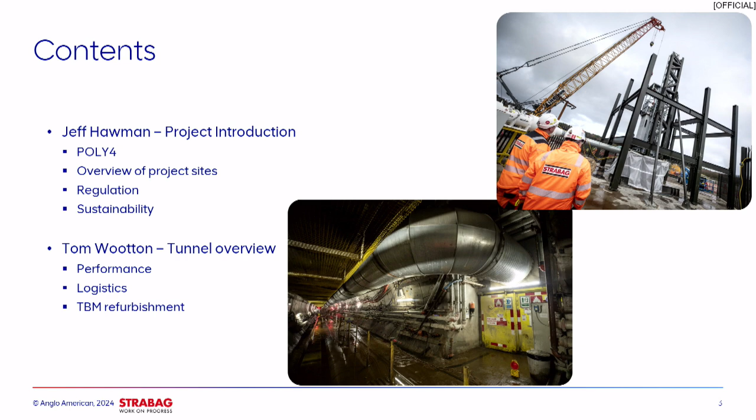I'll give a quick overview of what's in store for this presentation. I'm starting off with an overview of the project, Poly4, our crop nutrients product, a little bit about regulation, and then sustainability. Then Tom Wilton will talk about the tunnel in more detail, Callum will talk about our intermediate shafts, and then Ashley will talk about the challenges and some of the successes we've had on the project.

I'll start with the product, which is the reason we're building the Woodsmith mine. Poly4 is the trademark name for our polyhalite products from Anglo American's crop nutrients business. It's a multi-nutrient, low chloride fertiliser, certified for organic farming. It contains 4 of the 6 essential macronutrients required for plant growth: potassium, calcium, magnesium, and sulphur.

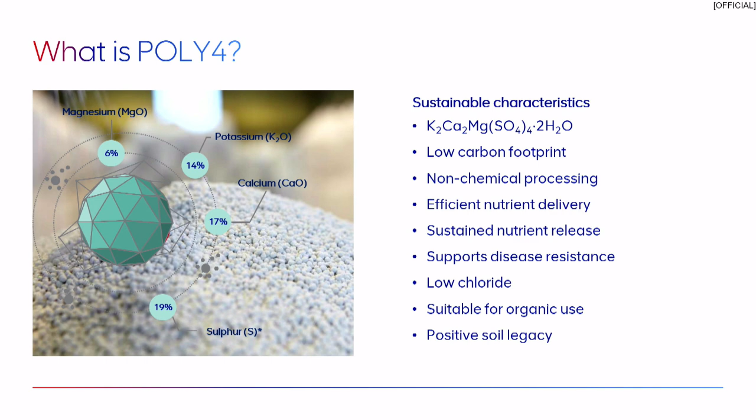This is a plan view of the Woodsmith Project. It's based in the north of England, from Teesside down to the North York Moors National Park, which isn't necessarily the place you'd typically expect to find a Tier 1 mining project. But the mine is an opportunity for Anglo American and also for the region and the UK in general. In addition to the capital investment we're making, the jobs we're creating, and the social programmes we're investing in, we're also building an extraordinary project which will help improve skills in the area and prepare us for future opportunities.

You can see from the slide in red that's the lease area for the project, and it's significant. Currently we're only focused on this small area for our ore reserve and mineral resource, shown in purple. This small area is made of 290 million tonnes of reserves and inferred resources. In the life of asset plan, giving us approximately 40 years of life, the exclusive mineral resource is approximately 2 billion tonnes, which gives us potential for decades to come, beyond the first 40 years.

Other key features of the mine are the 1-to-1 ore to product ratio, and we're targeting at full production 13 million tonnes per annum. In relation to the resource, it's not the only one in the world, but it is the largest known deposit of polyhalite in the world, and we have a unique resource with the size and scale needed to be a multi-generational mine.

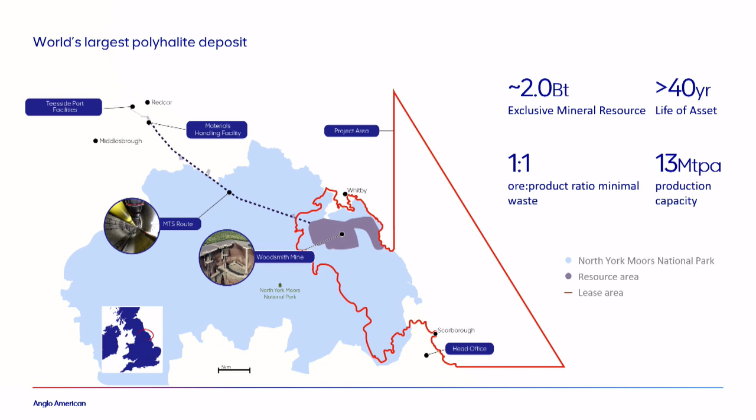A sectional view of the project. Red is current progress. Firstly, we're starting at the left-hand side, that's the Woodsmith mine site. There's two 1.6 kilometre deep shafts, the service shaft and the production shaft.

These will be sunk to the final elevation by our shaft sinking contractor Redpath. When done, these are expected to be the deepest mine shafts in Europe. From a status standpoint, the service shaft is at 804 metres and the production shaft is at 712 metres. The production shaft has benefited from lessons learned from the service shaft, which was started sooner. We're very pleased with the progress Redpath have made in the shafts since they started in 2022.

Slightly to the right of that on the drawing is the mineral transport system shaft and the MTS level underground facilities. That'll handle the polyhalite ore, which will come up the production shaft and will be transferred onto the tunnel conveyor.

Thirdly, going from there to the port is the tunnel. This is a 37-kilometre tunnel underground transport route, used to carry material from the mine to the handling facility at the port. Today we are at 29.3 kilometres in.

Along the route of the tunnel, there's two intermediate access shafts at Lockwood Beck and at Ladycross Plantation. To complete the picture on the right, we have a materials handling facility planned to be built at Teesside at Wilton, and a port facility into the River Tees. These sites are where the polyhalite will be granulated and loaded out for shipping.

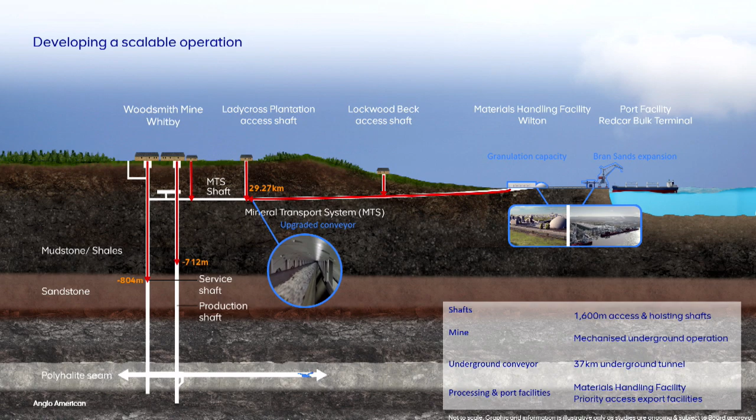Looking at these photos, you can see how different the Woodsmith project is to a traditional mine and the infrastructure approaches used in the past. This is the standard we are setting for the future of our industry and is something we're very proud of. Woodsmith is without a doubt the industry benchmark project in sustainability.

The future visual is the top left picture there of the finished mine site, what it's expected to look like. When in operation, you wouldn't really know it was there. It's just going to look like farm buildings.

In addition, we have very little impact to the area around the mine site due to the use of the tunnel to manage material from the mine to the port, limiting the number of people and materials coming to site.

To compare, you can see on the other pictures waste dumps and transport infrastructure that others have had to build in the past. You can see the visual impacts with large head frames above ground, long railways and significant dumps. They'll have their legacy, and we will be the opposite.

And this isn't just for operation either, this is also during construction. We abide by strict limits on lighting, noise, traffic, emissions and water to minimise impact to our neighbours in the National Park and elsewhere, and to the environment, and actually expect to achieve a net positive impact on local biodiversity. We're setting a new benchmark on how mining will be done in the future, today.

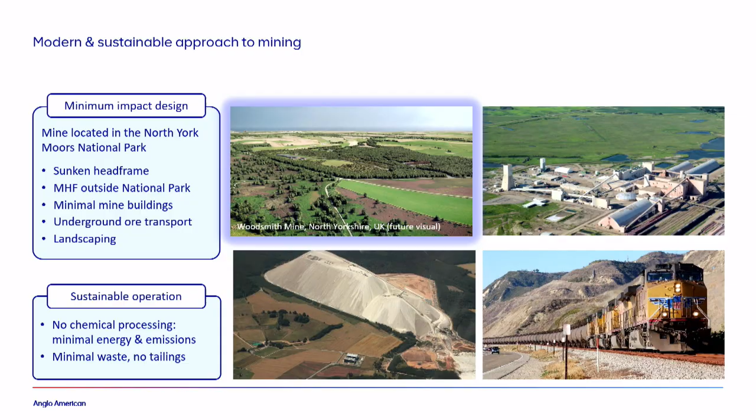This is a picture from last year of the Woodsmith mine site. You can see on the left there, that's the MTS shaft with the headgear. That'll all go when we go into operations. To the right of that is the production shaft and the service shaft with the headgear underground in the foreshafts.

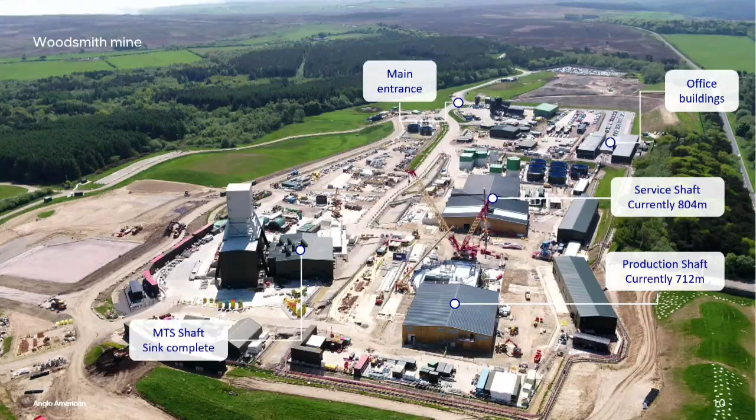This is actually a photo of the production shaft prior to the roof and the head frame being installed. It's an excellent photo to show how the shafts were constructed to minimise surface and visual impact. What you see is the foreshaft, which is a concrete encased structure around 43 metres deep. This houses the headframe, which will be used to move people and materials up and down to the mine.

This structure, again around 43 metres, would normally be on surface and be seen for miles around. But since this is being executed in a national park, and we are integrating with the needs of the community, we have sunk all of the steel below ground. This translates to a mine that has very little visual impact during construction and even less during operation.

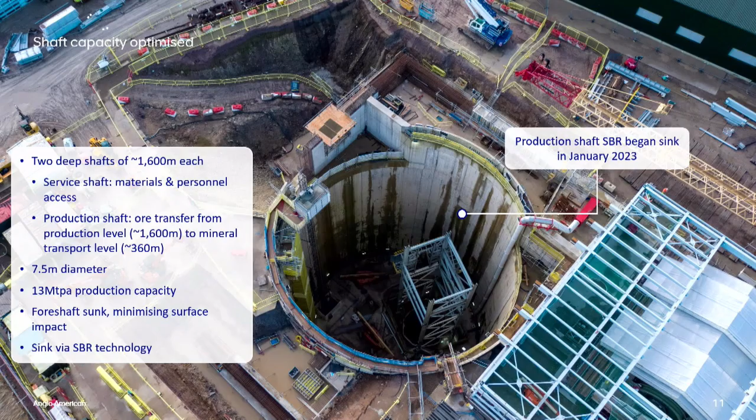We're using shaft boring road headers, SBRs, to excavate the two deep shafts. These SBRs are an updated version of those used on BHP's Jansen project and also in Belarus. These machines are inherently safer than traditional sinking. They also reduce the need for explosives, which is a huge benefit, and they're just safer, quicker and more predictable.

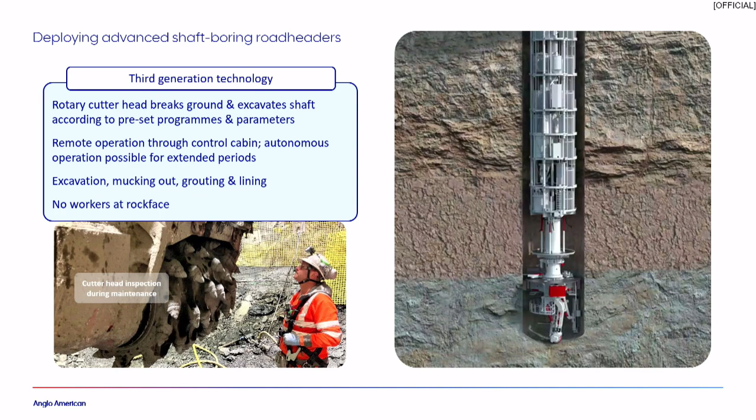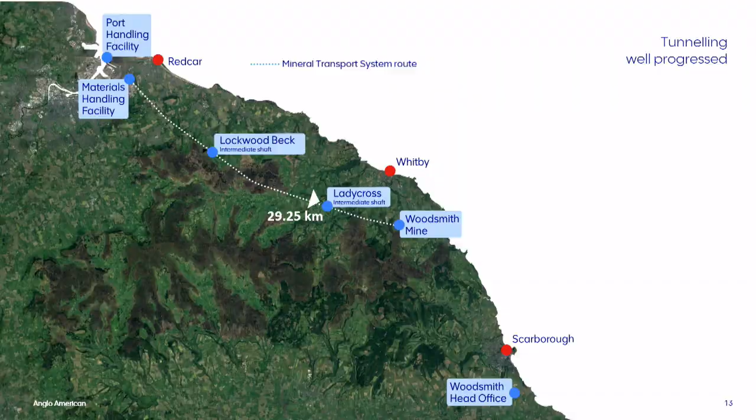So the tunnel is the backbone of the project and the future of the operation. It will be the conduit to provide the mine all the essential services for the operation, including power. It is our main transport corridor for the product via the product conveyor, and the tunnel eliminates many of the environmental and social impacts that mines typically have, especially with the communities. Ultimately, this is the most efficient and reliable transport system for our mine, and is another key reason why we will be a low cost, low carbon mine.

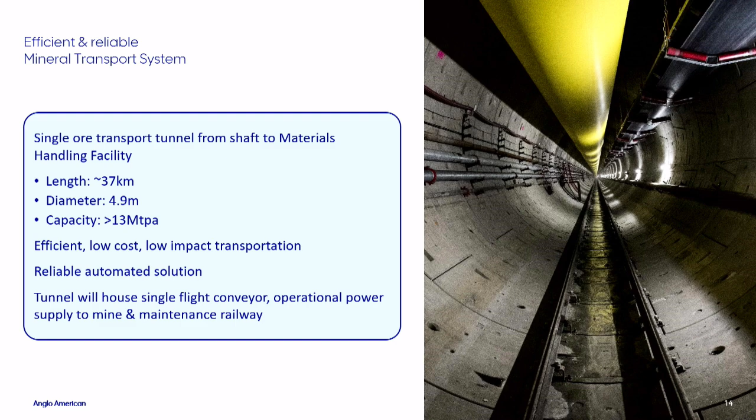Since the start of the project, the progress from the TBM has been excellent. There are many positives to talk about the tunnel construction, the main one being our contractors STRABAG. They're one of the world leaders in tunnelling technology and have successfully executed numerous large and technically complex tunnelling projects in many jurisdictions, and they are a world-class tunnelling contractor. One of the key features of the tunnel is that the ground conditions over the full length of the tunnel are very consistent within the Redcar mudstone. Conditions are very predictable, and cutting has been easy for the machine.

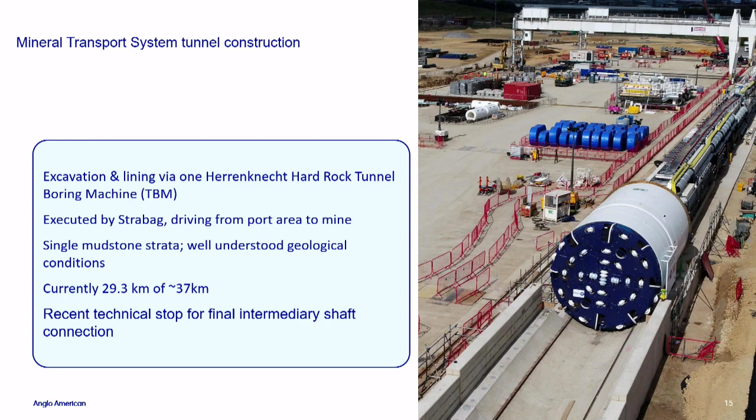Compared to many process plants in mining, this is very straightforward, as you can see from the simplified flow sheet. We crush and grind the product, mix it with a binder, granulate to produce 2 to 4 millimetre granules, and then it's dried and coated with a wax coating to protect it during transport and spreading. There's been considerable time spent over the last few years optimising the flow sheet via our on-site research and development facility, also at Wilton. And we are now satisfied we have the right flow sheet with known technology that can deliver the granules needed by the farmer in the field.

Nowhere in this process is there any kind of chemical processing like with muriate of potash. It uses very little water. Everything produced at this plant will be sold around the world and in the UK.

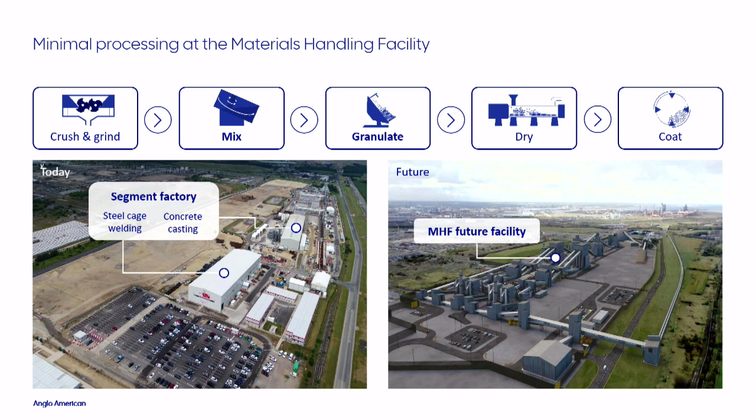The final piece of infrastructure for the project is our deep water port at Bran Sands on the River Tees, just a few kilometres from the tunnel portal. So we have our own fully dedicated, fully permitted deep water port. And once this facility is constructed, it will be able to handle all 13 million tonnes per year. Also nearby is the existing Redcar bulk terminal port, and both are near the exit of the River Tees to the North Sea. So dedicated port facilities, again, the theme of key structural benefits for the mine.

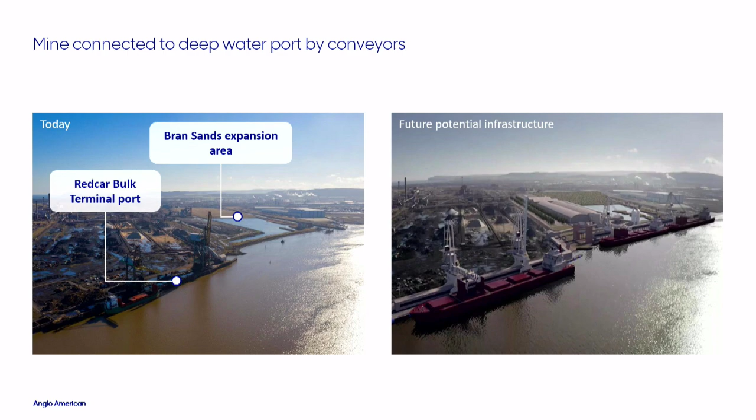Just to talk a little bit about the regulation of the project. Quite unusually for this sort of tunnel, the Woodsmith Project is regulated by His Majesty's Inspectorate of Mines, and the principal legislation is the Mines Regulations 2014. This is more understandable for the actual Woodsmith mine site, but for the tunnel scope it is unusual. It would normally be CDM, Construction Design and Management Regulations. The reason for this lies in the legislation and the purpose of the excavation, which is extraction of minerals. So this falls under Regulation 3 as being classed as a mine.

This different approach introduced change to the tunnelling construction and the risk management methodology. We believe it's the first time that a tunnel of this type has been constructed in the UK under the mines regulations.

Some of the differences we've found in the last 6 years is the different relationship between client and contractor. Anglo American, as the client, is also the mine operator, and they have specific duties under the regulations, particularly around safety. So we've had a very close relationship with STRABAG over the years, over things like safety, training, and competence. There's a lot more presence from the mine operator, from the client, on site than what would be normal. Appointed persons, for example myself, I'm appointed under the regs. I have superintendents and engineers also appointed. And likewise, the mine manager at the mine site also has an appointed team.

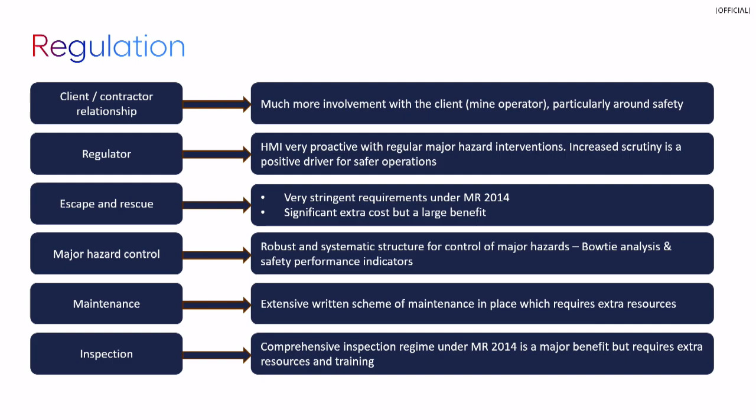We manage noise, light, traffic, and biodiversity with very strict limits and dozens of permits in place. The fact that we don't have significant processing or transportation on surface of ore means carbon, water and waste are minimised. For the community, we've generated $1.5 billion into the local economy since construction began.

Anglo American has committed to contribute $1 million a year to the Woodsmith Foundation, which has supported 550 projects so far. It's an independent charity with 5 objectives focused on education, health, hardship, environment and community facilities. All of these align to Anglo American's values and goals.

And finally, as the mine ramps up and succeeds in meeting its goals, the community benefits as we contribute 0.5% of our revenue during operation, roughly $10 million per annum. Our success and the community's success are intertwined during construction and operation, and this is really how the business should operate.

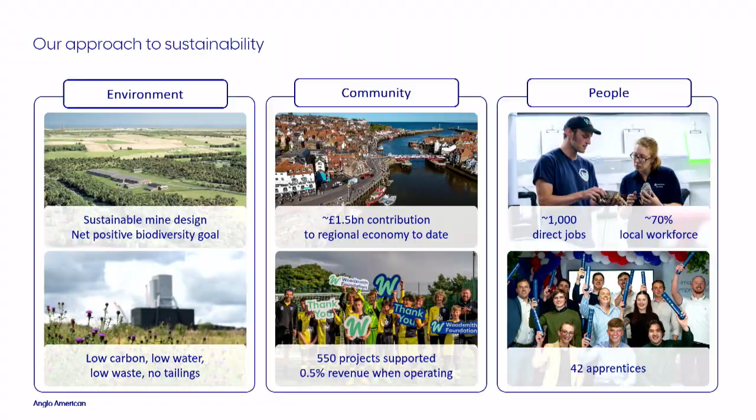Okay, thanks. I'll move on to Tom for the tunnel. Cheers.

Thanks, Jeff, and thank you for the kind words. I just want to run through a bit of an overview of the tunnelling side, what's involved in the STRABAG scope. Jeff's given a great overview of the project as a whole.

For us at STRABAG, our scope - Jeff's touched on the Wilton surface setup, the on-site production of segments. We have an on-site steel hall that fabricates the steel reinforcement, and then a segment factory which fabricates the segments used in the tunnel. We have a 300-metre launch ramp and 100 metres worth of SCL tunnel that was constructed to facilitate the launch of the TBM.

We then have the 37-kilometre MTS tunnel, 2 intermediate shafts - Lockwood Beck at 12.7 kilometres from Wilton, and Ladycross shaft at 28.5 kilometres from Wilton. We also have the SCL connection adits between the two, so between the MTS tunnel and the 2 shafts.

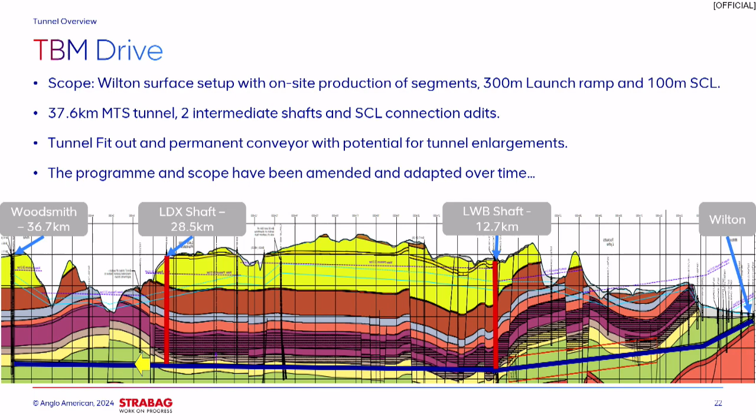Now, a 37-kilometre tunnel, the programme and scope have been amended over time. We certainly didn't set out with the intention of launching 1 TBM from Wilton and making all the way to Woodsmith.

I'll take us back to the very start of when STRABAG started on the project. The original contract and programme split the 37 kilometres into 3 TBM drives, each approximately 12.5 kilometres in length. Drive 1 was awarded to STRABAG, from Wilton to the Lockwood Beck shaft. The Lockwood Beck shaft itself was being delivered by others, sunk conventionally with a 9-metre diameter to facilitate the launch of a second TBM for Drive 2. The MTS shaft was going to facilitate a third TBM coming from the Woodsmith side and meeting up with that second drive, approximately the 26.9 kilometre mark.

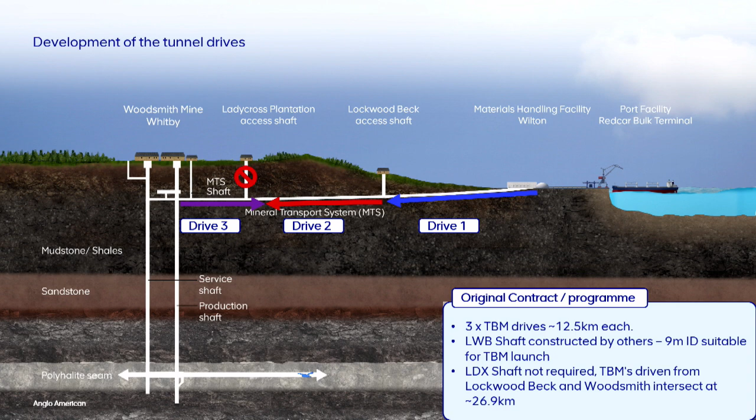At that point, the Ladycross shaft, although there was planning, wasn't deemed necessary as it wasn't a launch site or reception chamber, so it wasn't part of the planned works.

As works progressed and the TBM was launched, progress proved very successful. There were also some issues at Lockwood Beck - programming problems - and within a short period of time the TBM was bearing down on the Lockwood Beck shaft, and there wasn't the availability to launch a second TBM from Lockwood. This meant that there was an amendment to the contract.

It reduced the total TBMs required for the drive from 3 to 2. The intention being that the TBM launched from Wilton would continue on, past Lockwood Beck, to the 26.9 kilometre mark, and then the second TBM would be launched from Woodsmith.

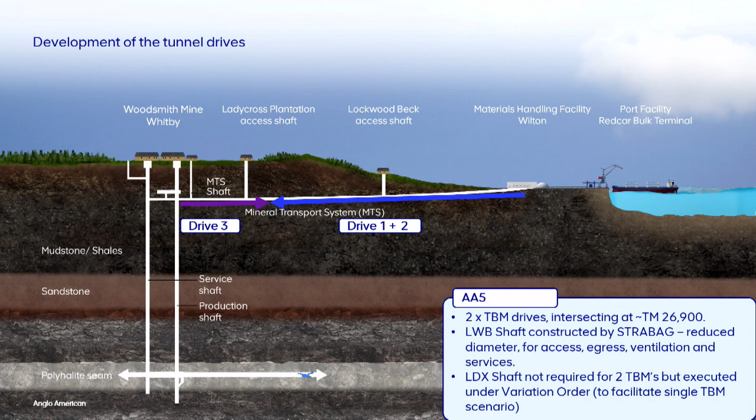At this point as well, they were intending to meet at the 26.9 mark, so the Ladycross shaft, although it wasn't vital, was then included in STRABAG's scope, just in case we came to a 1 TBM solution in the future, if the production rates were sustained for the second half as they had been up to Lockwood Beck.

Fast forward a little further, and we did maintain a lot of those production outputs. The TBM has done a fantastic job, and the teams operating it, and all the backup teams that go with it. There were some programming clashes as works progressed on the Woodsmith side with the MTS shaft. So we went away, STRABAG, and were asked to look at the feasibility of the 1 TBM solution with everything we'd put in place, to get to approximately 18, 19 kilometres by that point.

And we came back and essentially said, yes, we think it will be possible. At that point, we were glad that the Ladycross shaft had been added to our scope, and Callum will touch on that. But that's initially how we've got to the point where 1 TBM is doing the full 37-kilometre tunnel.

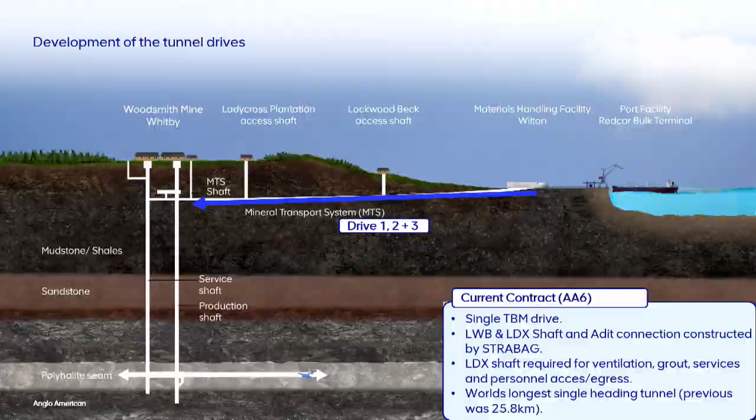As a nice aside to that, it does mean that we currently believe we've got the world's longest single-heading tunnel, the previous being 25.8 kilometres, and we've surpassed that.

Going on to the construction milestones, I'll give a few key dates. Going back to 2018, it's been a long project. April 2018, we started off with selection of the single shield hard rock TBM. Within 10 months it was on site, and 12 months it was fully assembled. April 2019 it was ready to move. In June 2019, the TBM then started its first advances.

By October the following year, 2020, 14 months later, we were at the 10-kilometre mark, and roughly 14 months after that, we were at the 18.6 kilometre mark. At that point, 18.6 kilometres is beyond the Lockwood Beck shaft. We were feeding everything from Wilton. We came to a stop at that point with the TBM.

We came back - the Lockwood Beck shaft had been sunk, and we were then in a position to connect up to that from the MTS tunnel using a shotcrete-lined connection. Also, as part of that stoppage, we did a refurbishment of the cutterhead and built a crossing outside of Lockwood Beck.

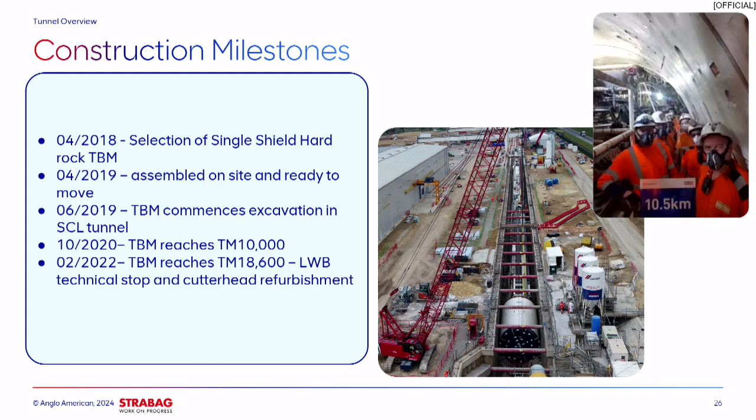Approximately 6 months later, in August 2022, we were in a position to restart the TBM. A couple of images show the Lockwood Beck conveyor booster that had been installed on the crossing just outside the adit. So the adit was complete, the cutterhead refurbishment was done, and we were in a position to restart.

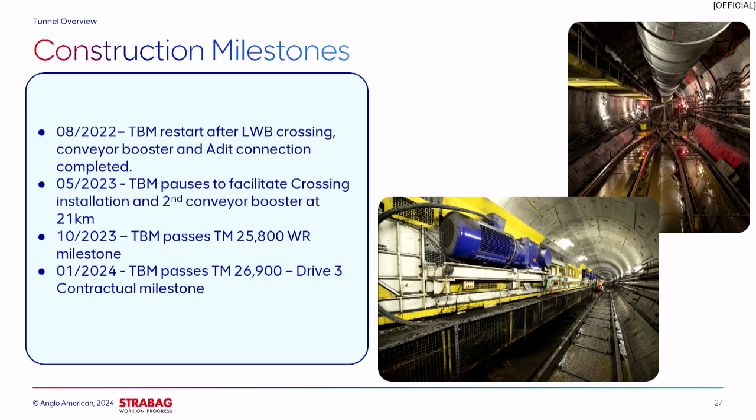The following year, May 2023, the TBM was at approximately 21 kilometres, and we paused to install another crossing location. Up to this point, we'd been running with 2 crossings - it was about time we added a third. The majority of the tunnel is single track, which I'll come on to in a second. In October 2023, we passed the 25.8 kilometre mark, and then in January 2024, we passed the 26.9 kilometre mark, which was originally the end of Drive 2 and into Drive 3.

Middle of last year then, 2024, the TBM just got past the Ladycross shaft location, 29.2 kilometres. At that point, the shaft was ready and waiting for us, so we parked up again and did a very similar exercise as what we'd done at the Lockwood Beck connection. We had a technical stop, constructed a crossing, conveyor booster, adit connection to the shaft, and also conducted refurbishment on the TBM.

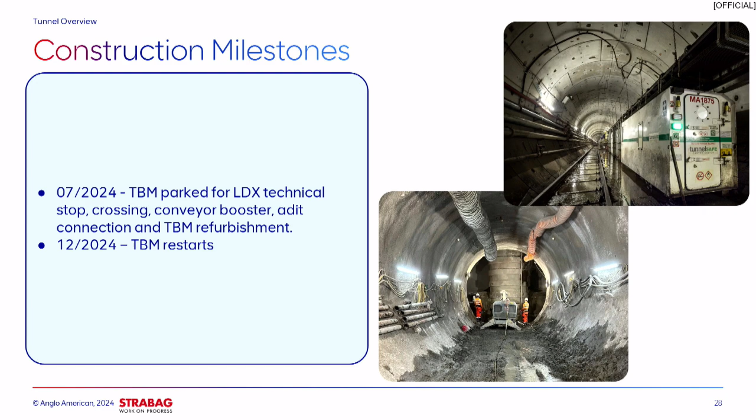December last year, so just before Christmas again, we were in a position to restart the TBM. That's a quick overview of key dates. If you put all that hard work and many millions of man hours onto a graph, that's what it looks like. There's a lot of work gone into it. But we're very proud of the performance that we've had.

Some of the numbers there: hard average, excluding the major technical stops, is over 20 metres a day. If you do include them, it's 16 metres a day. Best day to date is 52.7 metres, and the best month over a kilometre. A lot of the pauses that you can see there in production are what we just discussed with the technical stops and planned downtime. So the current position, 29.3 kilometres, and we are approximately 190 days ahead of programme, and that's something, again, we're very proud of.

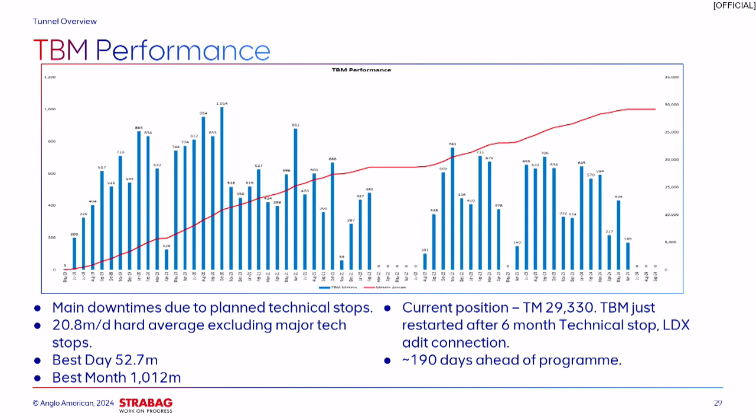So a little bit about the machine, the tunnel boring machine that's achieved this. It's a 6 metre bore diameter, 252 metres long, comprising 20 gantries. The segmental lining is 5.6 metres external with a 4.9 metre internal. That gives us an annulus of approximately 200 millimetres, so we inject 6 metres cubed of primary grout into that annulus. The segments are 1.5 metres wide and 350 mm thick, roughly about 3.5 tonnes, and all fabricated at the Wilton site.

There are 6 segments to a ring, and they're universal tapered rings. We have variations in the type of rings that we use depending on the overburden or exposure class, but in terms of dimensions, they're all the same. So there's variations in the concrete grade and amount of reinforcement.

On the TBM, we have capacity to store 3 rings. So there's three rings for the lifters. We can also then have an additional ring on the feeder. So the machine has been able to output high advance rates. We can achieve an advance and build cycle in approximately 30 minutes, so an advance taking 15 to 20 minutes and a ring build 10 to 15 minutes.

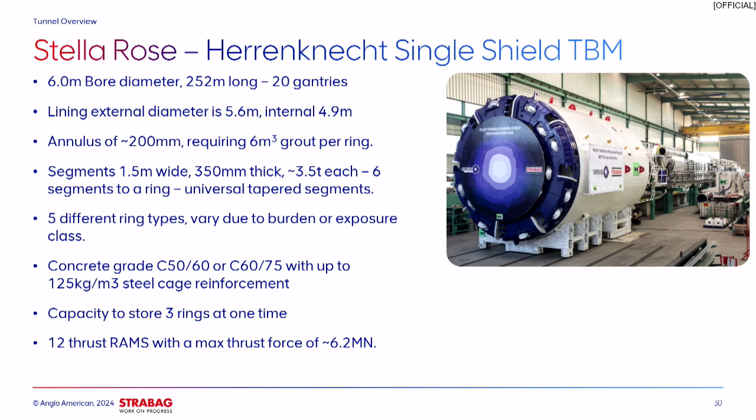Some of the infrastructure, as I've said, it's a single track for the majority of the tunnel. I'll come on to the crossings in a second, but they only make up a very small percentage. The majority, approximately 27.5 kilometres of the tunnel, is single track. It's in 9 metre sections and brought from surface down to the TBM, so that's over 3,000 sections of track that have been installed. There's no designated walkway in the tunnel. We have alighting stations, so designated hop-ups for team members to get off within the tunnel. Then it's used in the track, so we've had to separate people and plant through maintenance shifts and production shifts.

HV power, originally supplied from Wilton, is now supplied from Lockwood Beck. Ventilation, again, a key aspect, has been forced. It's initially forced from Wilton, now moved to Lockwood Beck, and once the Ladycross adit fit out is complete, we'll be moving the fans underground into the Ladycross adit, and they'll be forced into the TBM, and then exhausting all the way back to Wilton surface. Cooling water is supplied from Wilton, again pumped 29 kilometres, and then dewatering in the tunnel, again pumped back out again, a further 29 kilometres with 17 stage pumps.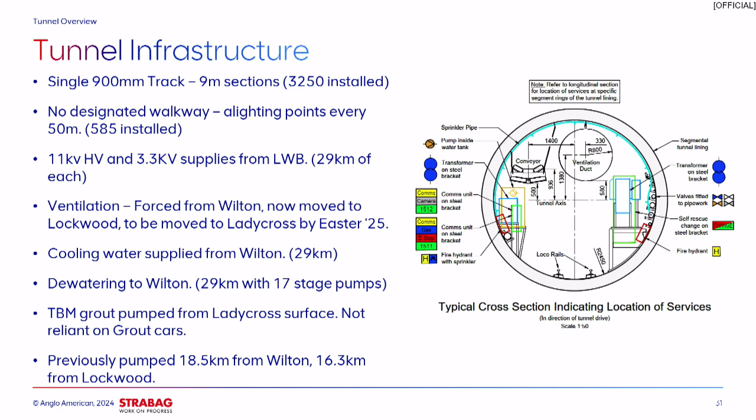Logistics within the tunnel. Currently we have 5 crossings. So working from Wilton on the left, District 1 in the pink, that's approximately 6 kilometres. So from Wilton to the first crossing, we've got 6 kilometres. That's a fixed crossing in that location, steel construction, a single loop for trains to pass. After that, District 2, another 6 kilometres until we get to Lockwood Beck, with a double loop, one side of which is where we enter the Lockwood Beck adit, so that's primarily closed off.

Districts 3 and 4 then, with the 21 kilometre fixed crossing in between. Those 2 districts are 8 kilometres each, and then we get to Ladycross, the latest that's just been installed. There we've installed 3 loops so that we can allow trains to park up and pass.

In total, we've had 22 locomotives. They're a mixture of hybrid and full electric, so diesel electric hybrids and full electrics. Running up to 5 production trains at one time, which is a tandem set, so a hybrid and an electric. Currently, the travel time from Wilton for a production train or a maintenance train to get down to the TBM is 1 hour 50.

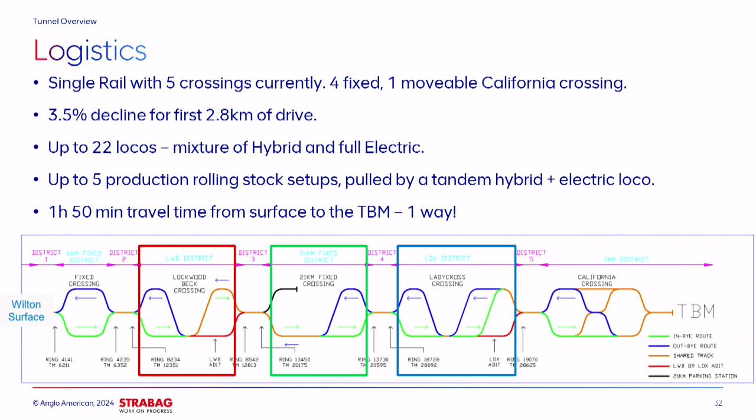A lot of planning has to go into making sure that the operation runs smoothly. It's not a quick fix, just to nip back out to the stores if you forget a pair of pliers or such.

A very brief overview of the geology. So the first 800 metres of the tunnel is through glacial till. Initially that was going to be all SCL, but after the first 100 metres or so, the ground conditions improved and the decision was taken to finish the SCL tunnel at 100 metres and launch the TBM, which proved to be a good decision.

Beyond that, primarily we've been mining through the Redcar mudstone. It's a weak, relatively low permeability rock, but there are areas with ironstone nodules and variation within the subclasses of Redcar mudstone.

The tunnel itself is relatively straight. We don't have to worry about too many curves. Maximum or the minimum curve radius is 6,000 metres, but the maximum overburden is 400 metres, so it's deeper than a lot of other tunnels currently in the UK.

Along the alignment, there's 15 major fault zones. We're currently approaching the 14th of the 15. We've also passed under various mine workings, potential for water if they were connected, approximately within 100 metres of some of the old ironstone workings. And we've also experienced a little bit of methane along the project, although it's not necessarily been linked to the fault zones.

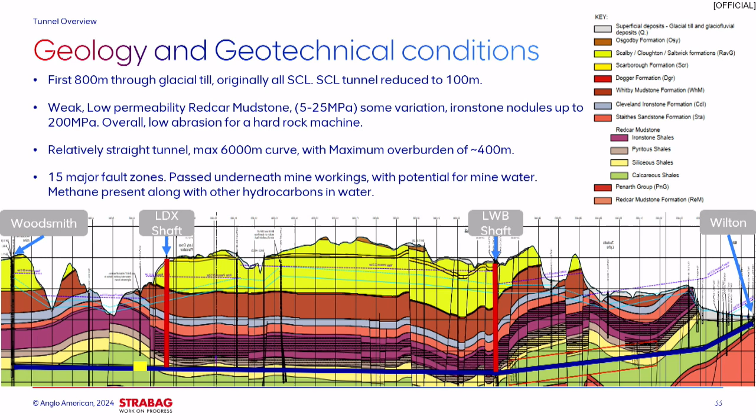So the mudstone and the fact that we've a hard rock TBM with the hard rock cutterhead, it's generally given us low abrasivity. There's been a low turnover of wear on the front. But after the distances involved, we have had to do some repairs to the tunnel boring machine.

In general, throughout the life of the TBM, we've done our utmost to ensure that maintenance is carried out on the back of the machine, but there are areas, i.e. the cutterhead, that you can't necessarily access normally. We've been fortunate to have the Herrenknecht expertise on the project. We've also made changes ourselves.

There's been several adjustments to shift patterns. Whilst it's nice to have 24/7 production, 4 or 5 times across the project we've introduced more and more maintenance periods to ensure that the infrastructure behind the TBM that I've touched on is in a good condition to be able to maintain a steady output. In terms of wear on the cutterhead, we do regular inspections. Cutter discs we can replace from within the cutterhead.

Generally, they're a low turnover. However, over time, there was indication that, especially around the gauge of the cutterhead, there was a lot of wear starting to occur, primarily on the Hardox wear plates. And the decision was taken that we would need to be able to access the front of the machine to conduct repairs.

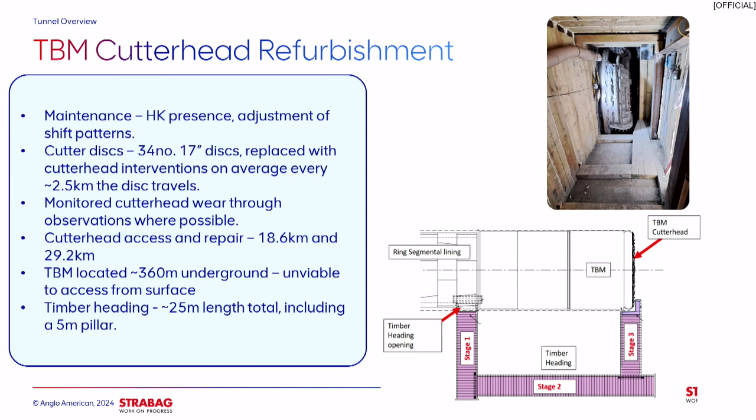This piece of work was undertaken twice, like I say, Lockwood Beck and Ladycross. On the last built ring, when we came to a stop, the key segment was removed, and that provided access to the mudstone behind.

The excavation profile was 1.6 by 2.1, with the timber frames given an internal profile of 1.4 by 1.8. Relatively tight confines as timber headings are, albeit not normally at this depth.

We managed to mechanise as much as we could. A lot of the excavation using a Brokk 70, very capable especially for its size, and mini conveyors underground to reduce manual handling.

Once the access was formed, we have had incidences of methane, but given the excavation time, a lot of that had desorbed, and we were able to manage the hot works effectively.

Once we were complete with the repairs, we backfilled those timber headings, reinserted the key segment, and once the Lockwood Beck or Ladycross adits were complete, the TBM was able to continue.

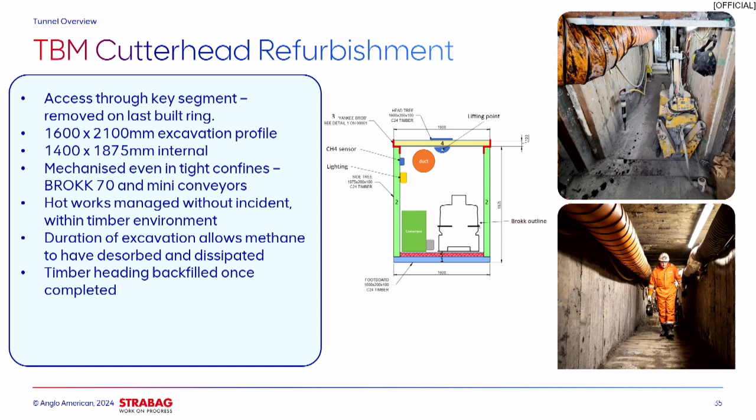So as of December, we've finished the second repair, and hopefully it's good to go for the remaining 7.5 kilometres.

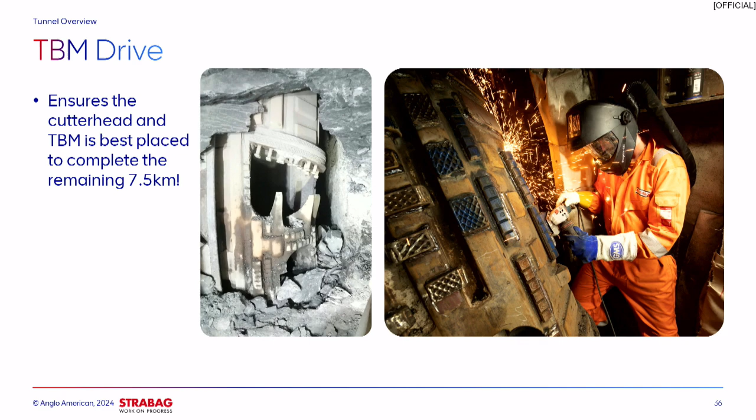Okay, I'm going to pass over to Callum, who's going to take us through the shaft construction.

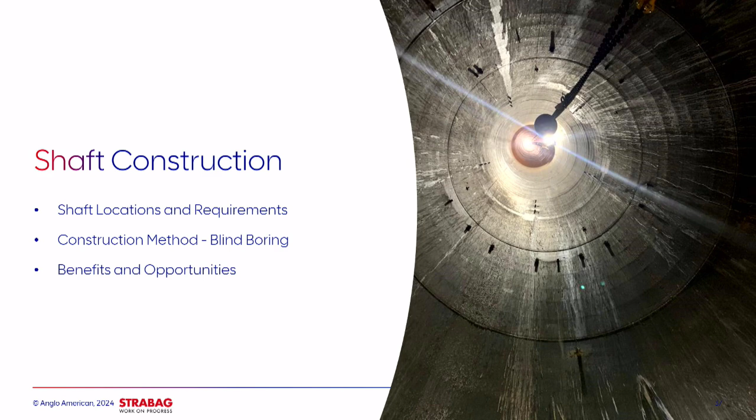Great, thank you, Tom. Good evening, everyone. So as Tom said, I'm going to take us through the shaft construction. We'll have a look at the shaft locations, the requirements of the shafts, the method that was chosen. I'll give a bit of a whistle-stop tour on how that method works, and then some of the benefits and opportunities from the blind boring.

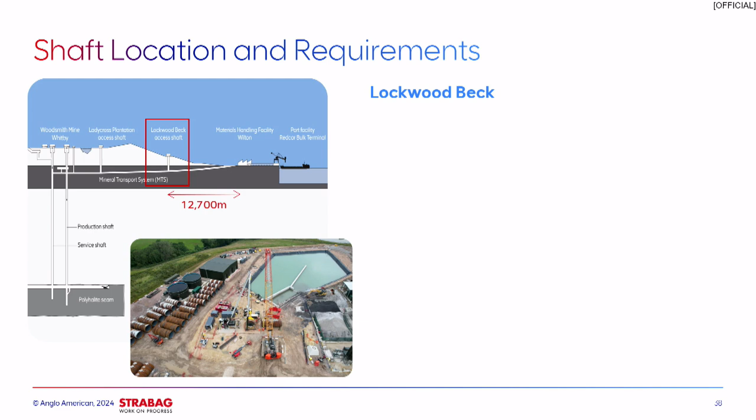So Tom mentioned previously the first shaft that was required from STRABAG was at Lockwood, Beck. The initial plan was for that to be a launch site for a TBM. However, things changed throughout the project lifespan, and it meant that there was a significant change needed. A launch shaft was no longer required. The contract had been amended to permit the continuous operation of TBM1 past Lockwood, Beck and towards Ladycross.

However, the services supplying the TBM were starting to reach their capacity, namely ventilation, which could take us through to 18 kilometres, around 5 kilometres past Lockwood, Beck. Grout was starting to see some issue. Power was a single source, so there was opportunity to back up our supply.

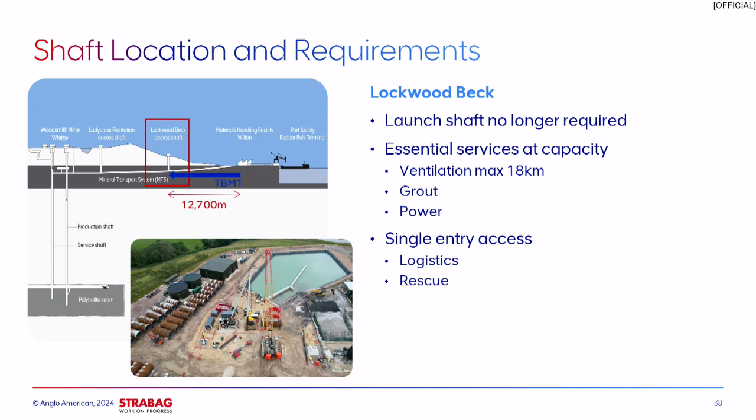But also from a safety standpoint, we were single entry, so from a rescue perspective, there were some threats to us. And also from a logistics viewpoint, it would take a long time to get us from Wilton to the current TBM position. The key challenges that we faced, it was a change to the overall scope.

And it was a change that meant that the programme fell onto the full project critical path. So that was kind of one of the key drivers for the decisions that we therefore had to make.

Geotechnically, there were faults within the Lockwood Beck site, and there was also groundwater which caused challenges. A contractor working on the site previously had sunk a shaft to around 50 metres, and there was significant challenge with inflow of water up to about 200 cube an hour, and the solution to grout that was also a challenge.

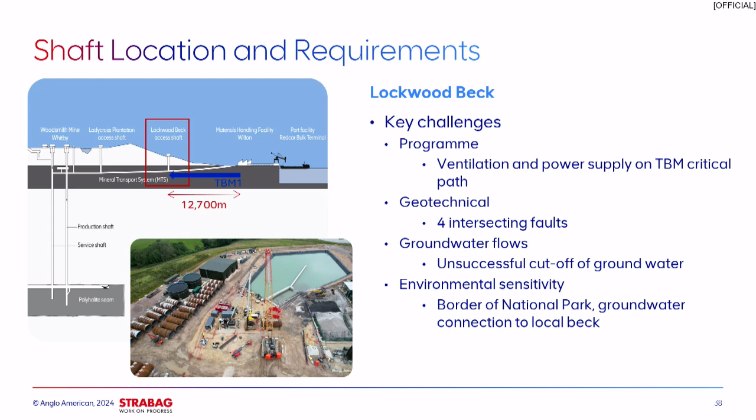Environmentally, we were on the border of the national park, so that brings its own kind of environmental sensitivities. So the shaft that was needed, depth-wise at Lockwood Beck, was 378 metres.

We had a number of different parameters that we had to fit into the shaft, and that's what came into our decision making. The ALIMAK lift car would lift 16 people up and down the shaft. Ventilation would be fed to the TBM, but also as a fresh air base at shaft bottom. Mechanical services of grout and water, as I mentioned. Electrical cabling, comms, lighting, and then a head house with the provision for rescue.

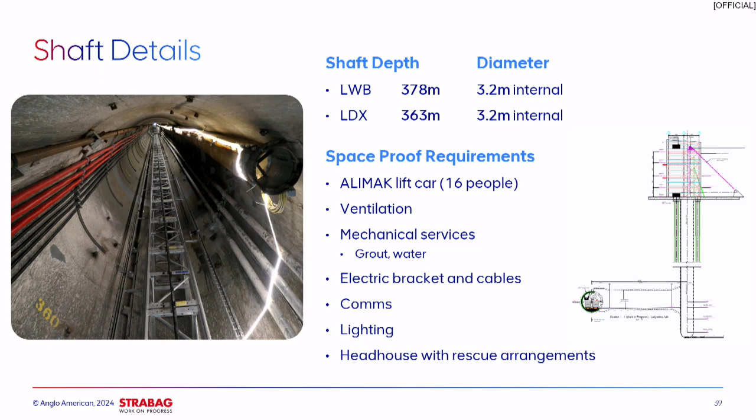Assessment was done to consider how we could reduce the diameter of the shaft and introduce new potential construction methods. We ultimately came to an internal diameter of 3.2 metres that would suffice. We assessed the various options of excavating and constructing the shaft, and one of the key parameters for us here was programme.

After various assessments, blind boring was selected as the primary option for us. For those who haven't seen it before, what is blind boring? Ultimately it's a deep shaft construction methodology, an alternative to conventional drill and blast, where works are undertaken from surface until the shaft is complete. It's much more commonplace in Australia and the United States, where the method is used for ventilation shafts to mines. It's also been seen in the UK, in South Wales in the 80s, for a similar ventilation shaft.

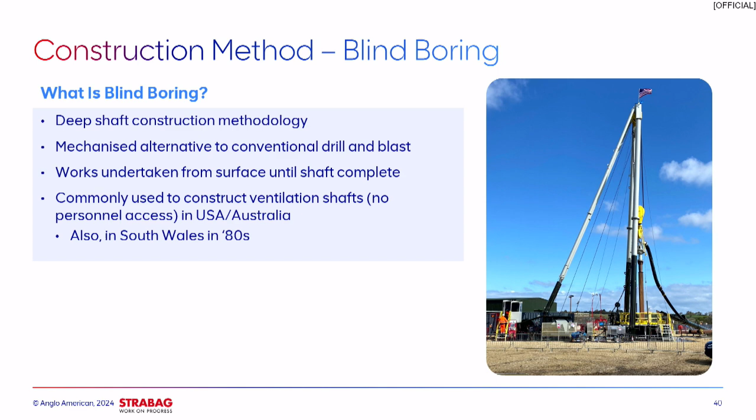We employed a contractor and worked very closely with a contractor from the States, Shaft Drillers International. SDI have rigs capable of shafts up to 5 metres in diameter and up to 550 metres in depth, so it fit our parameters. We also used, where possible, the local supply chain — a key example of that is the shaft lining.

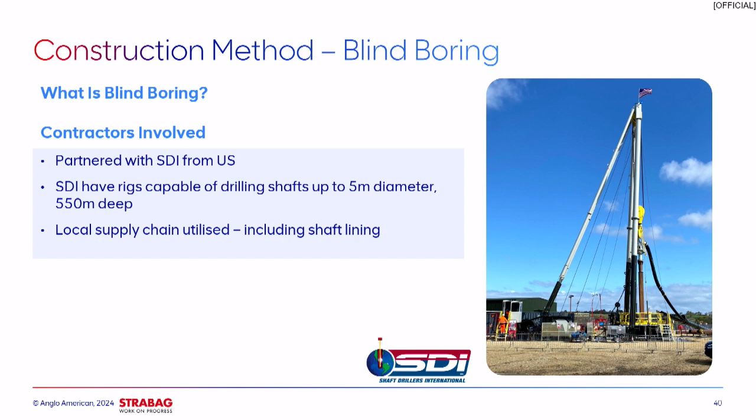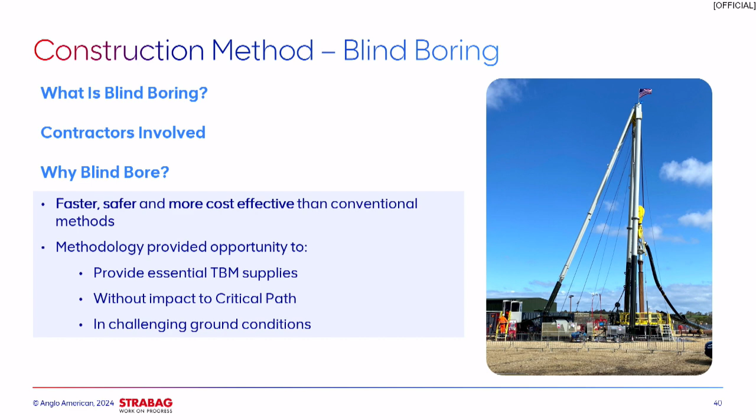Ultimately, as an assessment, why blind bore? It is faster, safer, and more cost-effective than conventional methods. For us, it provided the TBM supplies we much needed to continue the TBM drive without impacting our critical path and working through some challenging ground conditions.

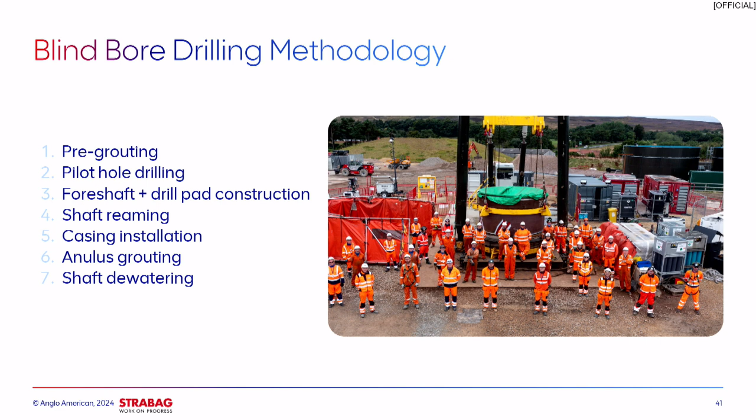So the methodology of blind bore has 7 phases that have been broken down. I'll take us through each one of those. I haven't got enough time to go into much detail, but I'll cover the key aspects of each item.

Firstly, pre-grouting. Ultimately, pre-grouting is integral to the success of the methodology. Grout holes are drilled around the circumference to varied depths, using a top-down observational approach to heal the ground. The objectives are twofold: one is to stabilise the ground to avoid any collapse, and secondly, to ensure the ground can withstand a body of water, which is essential for the following stages.

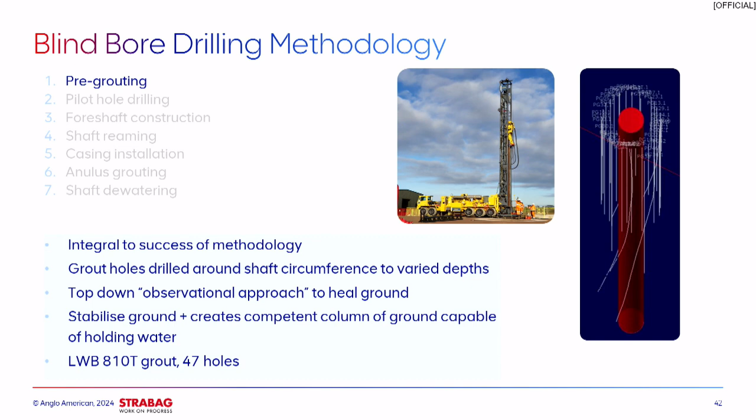In terms of numbers, at Lockwood Beck, we pumped 810 tonnes of grout over 47 holes.

I also wanted to mention at this point that at Lady Cross, which I'll come on to briefly towards the end of the presentation, we introduced an environmental curtain. That was a secondary grouting ring on the extrados of the cementitious grouting curtain. We used colloidal silica to externally cut off any cementitious material and the risk of it polluting drinking aquifers. There was an increased cost of doing this — it was an unknown and a challenge — but it reduced our risk and simplified the cementitious programme.

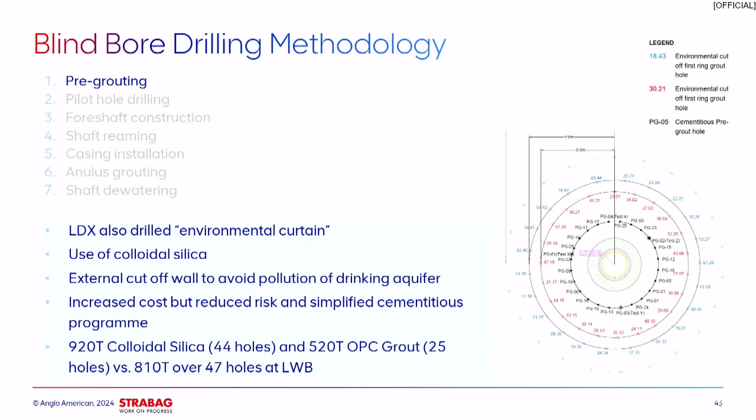Just some quick numbers: there was 920 tonnes of colloidal silica pumped over 44 holes, and you can see that this did reduce the actual cementitious grout take in the second pass.

Once complete, a pilot hole is drilled. This is a guidance hole which directs the blind bore. Using directional drilling methodology, a hole of about 400 millimetre diameter is drilled full depth with technology to keep it vertical. For us at Lockwood Beck, survey showed us to drill the hole within 87 millimetres at 390 metres in depth. At this point, it also gives an indication of the success of our pre-grouting programme.

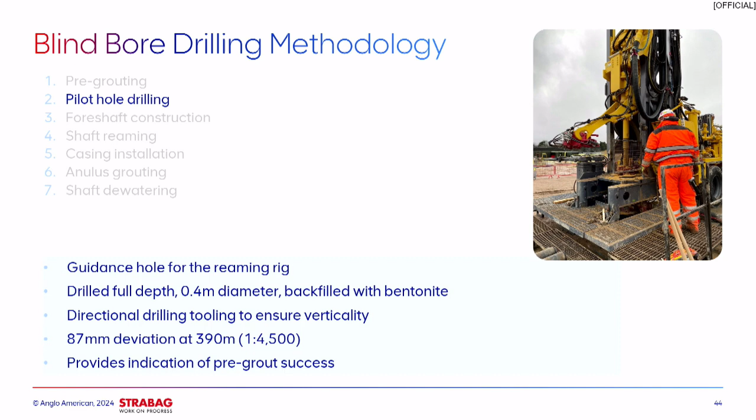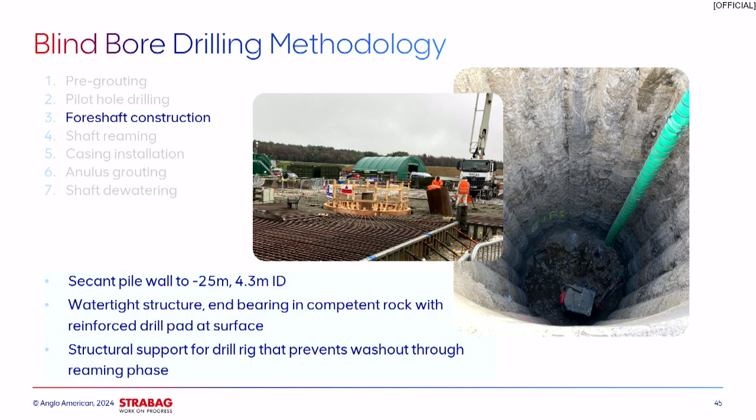Following that, the foreshaft is constructed. To do so, there's a secant pile wall — in our case, 4.3 metre internal diameter, down to 25 metres, end bearing in the competent rock below. On surface is a drill pad. Ultimately, what we're doing there is taking the loads from the drilling rig and drilling operation and passing those through to competent ground. It's a watertight structure which prevents the potential washout of superficials in the upper ground.

Kentledge is applied on top of that, and that's lowered into the shaft. A turntable is placed on surface, and that provides the rotation, and as the cutter teeth engage, it cuts the rock. Reverse circulation process is then brought in with the use of air injection to create a differential pressure in the ground, and therefore an uplift of the water within the shaft.

As I mentioned before, it's essential that a successful pre-grouting regime maintains that head of water to enable that to happen. Drill string is added as the shaft proceeds, continuing to excavate down to full depth. To give a flavour of time frame, our hard average was about 4 metres per shift, taking roughly 7 weeks to excavate the shaft.

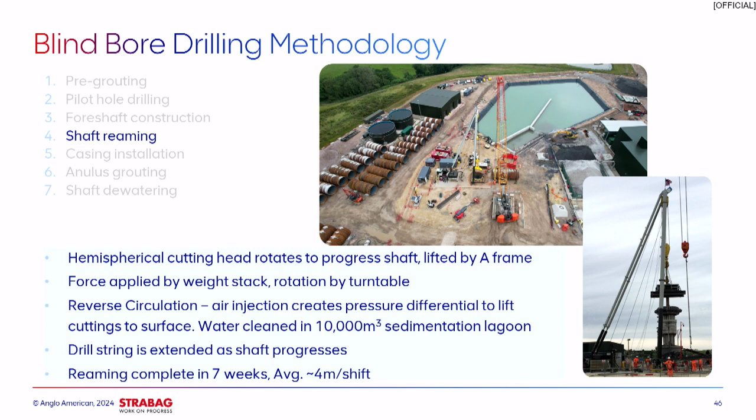Once the casings are lowered to the shaft bottom, the annulus between the cut ground and the casings is filled with grout in stages from bottom to top. Then the water from the intrados is pumped out, and the shaft is complete, ready for handover to the fit-out teams.

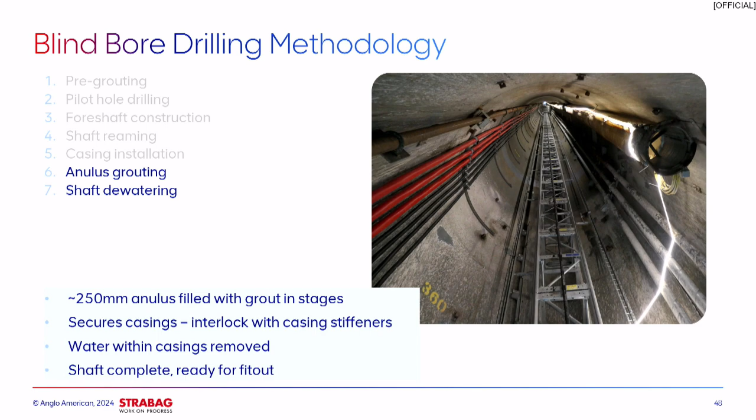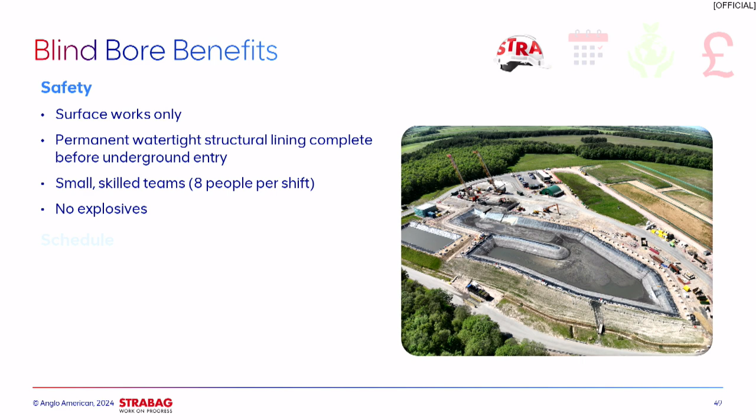As an overview of the benefits of blind bore, firstly is safety. It's surface works only until a permanent watertight structural lining has been installed, with small skilled crews working around the clock. Obviously, if you compare it to a conventional method, there's no requirement for explosives.

And for us, what was key here was programme. The methodology has many programme advantages. For us, we had a turnaround of 11 months from starting the process, from the grouting before the piling, to completion for fit-out in 11 months.

Our estimations were that there was still a year's work to complete the setup of the winders. So we'd finished the shaft before we'd even potentially start excavating. In terms of the comparison, during the excavation and lining phases, we averaged 4 metres per shift, around a 75% reduction in comparison to a conventional sink.

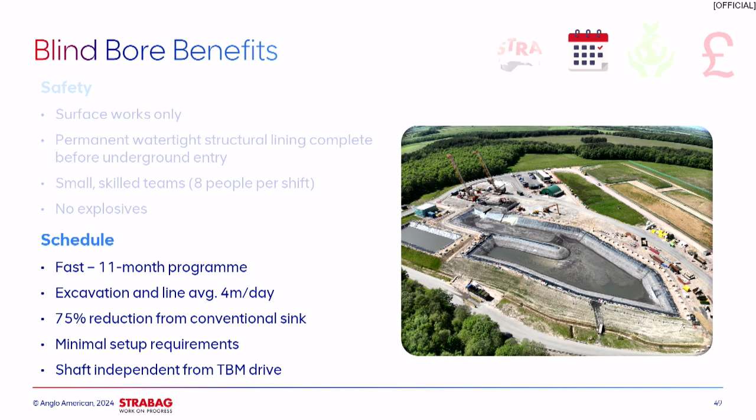With minimal site set requirements and also the advantages of setting up and completing the shaft completely independently from the TBM drive, there were a number of schedule benefits for us. Environmentally, there's reduced noise and visual impact over the method with a reduced construction footprint and no requirement for head frames or winder buildings.

In terms of a comparison between a conventional sink, which I appreciate was 9 metres in diameter, versus our significantly reduced diameter, there was an 84% reduction in spoil produced, and we assessed around a 60% reduction in carbon related to the construction methods.

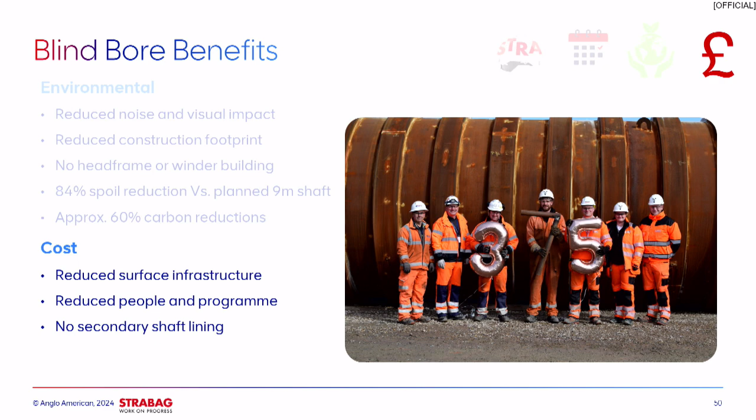With a shorter programme, with less people and less infrastructure and setup, and also no secondary lining required, there's also a number of commercial benefits for the method.

So was it a success? Ultimately at Lockwood Beck, which was the first of the shafts to be drilled, it was an innovation. It was a new method that had not been seen and used in this way before, brought into the market. We collaborated very closely with our supply chain, between Anglo American and STRABAG, and we delivered on time, overcoming the challenges. We completed without safety or environmental incident.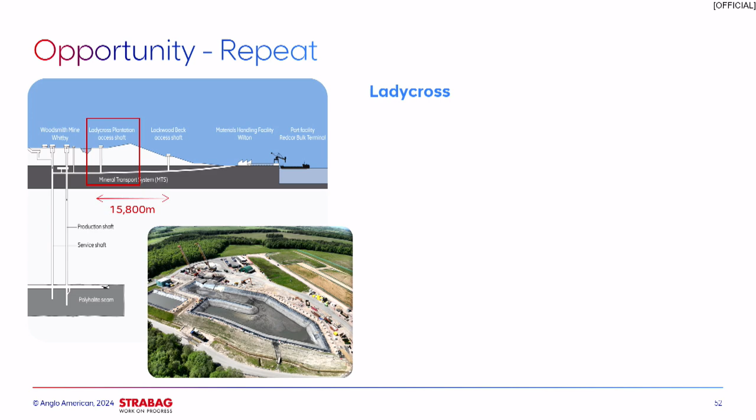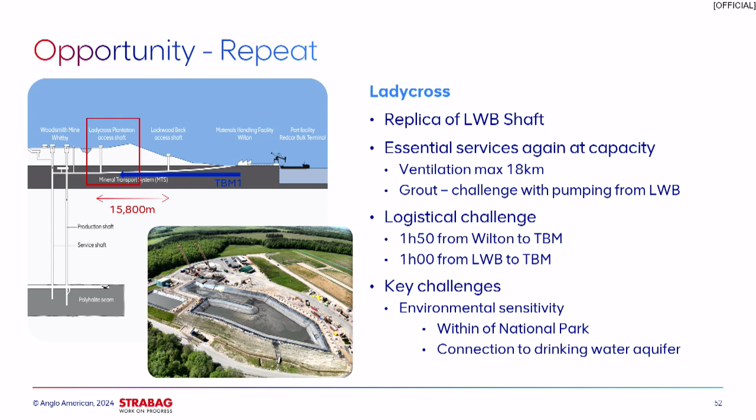We then had the opportunity to repeat the process, as Tom has touched on. The overall project changed again with a single entry TBM and a 1 TBM solution all the way from Wilton to Woodsmith. That could be facilitated with a second shaft, which was then instructed for us at Ladycross. Again, a replica with similar benefits that I mentioned before, but we were now within the national park and had a connection to a drinking water aquifer, so it brought a few new challenges.

We took a lot of opportunity to assess the successes, but also, with any project, the failures and opportunity for improvement, ran lessons learned sessions, and then had the opportunity to develop those solutions and implement them. I know we're running a little behind schedule, so I'll pass over, but ultimately the Ladycross shaft was successfully sunk at the end of '23, and as Tom mentioned, we recently connected through with the adit from the tunnel.

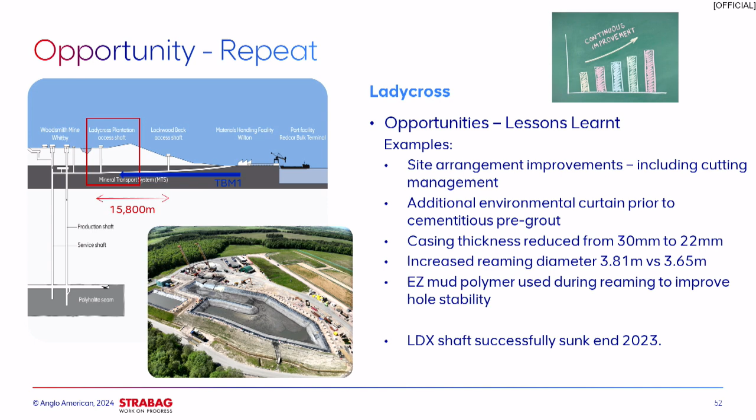Thank you. I'll hand over to Ashley, who will run us through the key challenges and successes for the programme.

Good evening, ladies and gentlemen. I think I'm a bit tight for time, aren't I, John? Okay, we'll see how this... there's only 48 slides to go. No, you're all right, you're all right.

So I thought I'd cover some of the challenges and successes, and I think they go hand in hand on the project. A project of this scale and the distances covered brings numerous inherent challenges with it. Tom, Callum and Jeff have covered a number of those, from pumping grout 18.5 kilometres to keeping a TBM operating successfully for 29.3 kilometres. There's been numerous challenges throughout.

I thought I'd start with the adits. Callum has just talked about the shafts that have been sunk at Lockwood and Ladycross. We had to connect those to the tunnel. The first challenge we encountered on the project is terminology - mining and tunnelling sometimes have different terminology for the same things, so there's been quite a lot of debate. I've left it as 'adit' because that's what it said in the contract, but I think Jeff would say otherwise. There's been a lot of transfer of knowledge between the mining side and the tunnelling side - it's been really interesting, and mapping across that knowledge and learning has been really beneficial to the project.

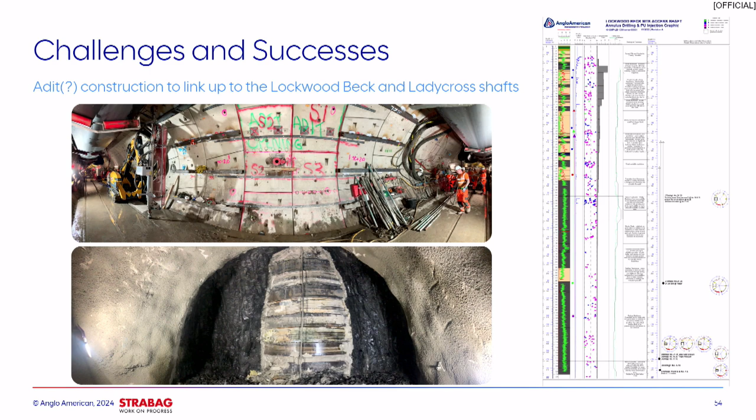When the spray concrete lining works were finished, you've got the example on the left. You can see the back of the tunnel lining, the precast lining, and because there's a crossing at this location, the proximity between the ventilation bagging - in yellow there - and the orange of the locomotive is really, really tight. Space is at a premium trying to fit these works in. This isn't quite finished - on the left-hand side there was additional permanent propping on the back of the lining, which went in place and was then cast in.

The purpose of these adits was to provide primarily access and egress, but also ventilation, grout supply, and power supply. We needed to protect those locations - the first at 12 kilometres and the second at 28 kilometres - making sure they're safe for people to access and egress. So should there be a fire in the tunnel, for instance, we can protect both the shaft side and protect people in the tunnel. We used mine doors - a company called American Mine Door supplied fire-rated, 2-hour fire-rated mine doors that we could install either side inside the adit, so we could protect the shaft from the infrastructure in the adit, and protect the adit itself from anything that may happen in the tunnel.

So the top right, there's just a schematic of the adit itself. We had a ventilation fan installed in the adit, drawing air down the shaft, and at the bottom we had a transformer for the power supply at Lockwood Beck. And on the right, at the bottom there, you can see the finished product.

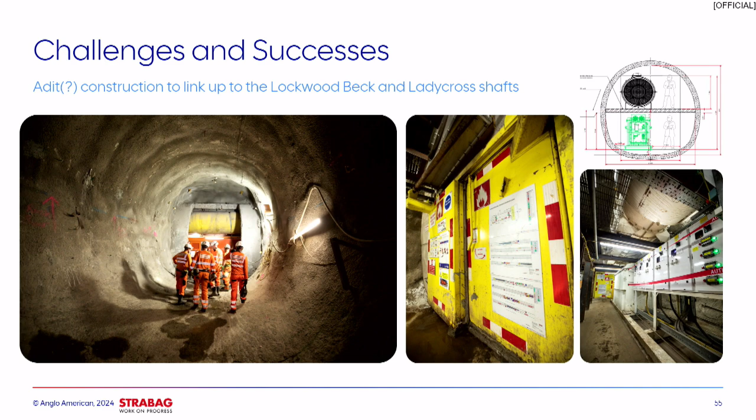So a couple of other challenges, the locomotives - Tom's mentioned we have tandem sets. They're a combination of electric and hybrid locos in each tandem set. As the project progressed, the tunnel got longer.

Then one of the significant challenges was looking at the fire risk from lithium batteries. When we first investigated this - done between ourselves, Anglo American, and the Mines Inspectorate - there was very little guidance, no regulation, and very little knowledge in the market. There were some guidelines we found from the Global Mining Guidelines Group, and individual papers, but it took a lot of research to assess how we can manage those batteries safely and ensure we're not putting people at risk.

There were a lot of controls developed as a result of this - control of the rolling stock movements, we needed to make sure we know where each loco is. The tunnel is split up into districts, which is mining terminology from the mines regs, and we can only have one loco in any one district at a time. So we needed to prevent collisions.

We had to understand the battery chemistries and make sure we had the lowest risk battery chemistries - in this case, lithium titanate. And then understanding the battery management systems and how the locos are operating by going through the black box data. So lots of controls put in place to overcome the challenges from the regulator as to how we know what those risks are.

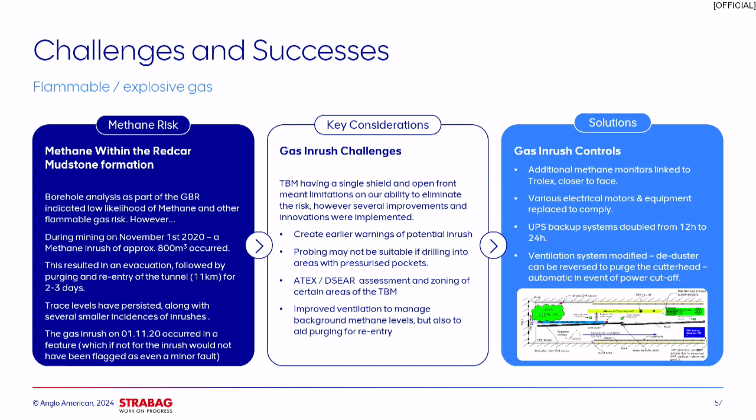So I've tried to skip through those fairly quickly - apologies if it's a bit too quick, but I thought we'd go through some key numbers because engineers always like numbers. And I think some of the numbers are quite remarkable.

The greatest distance we have between any egress point in the tunnel is 15,800 metres. The current tunnel length, as we've stated, is 29.3 kilometres. For context, for those of you south of the Thames, that would be from this room to Redhill. And for anyone north of the Thames, it would be from this room to the edges of St Albans. So it's quite some distance.

The conveyor belt is a single belt with 3 boosters in line, and it's currently about 59 kilometres. The finished tunnel length is nearly 37 kilometres. And for one revolution of the conveyor belt at the minute, it's 5.5 hours.

To date, on site, we've manufactured 131,000 segments, which is 89% of the total. So we're not quite finished yet - it feels like we're nearly there. There's another 7 kilometres to go, which is a decent job in its own right, but I think it's testament to the teams involved.

I know we talk about collaboration a lot on projects, but I think this is truly an example of it. We've got the merging of mining technology, mining regulations, with a tunnelling approach, and I think it's been really refreshing. Anglo American have been a dream to work with. We've got a really unified team and everyone's got the same purpose. I think that's been reflected in both the performance, but also the fact that the retention of people on the project has been so consistent throughout.

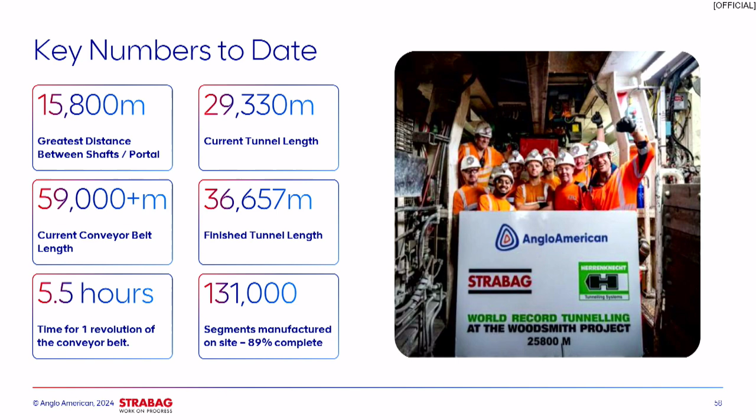So I think on that note, I'd say thank you to all the teams involved. We've put a number of suppliers on here who have been involved in the project. It's very difficult to get everyone, but without the teams, Anglo, the Mines Inspectorate and all of those suppliers going, we probably wouldn't be as successful as we are. So I think it's been a fantastic team effort. I think I'll leave it there.